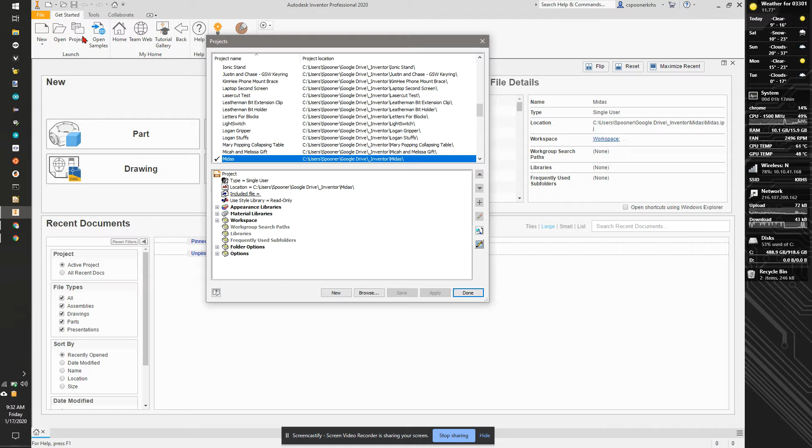I'm going to start a new project called Midterm Prep, and start off with the simplest, main part, the big block piece. On your midterm, you'll have drawings showing how big everything has to be, and it'll be your responsibility to dimension them properly. Here I'm just going to make up numbers since I'm doing a sample. So I'm going to start with this main block piece. It's going to be 4 inches by 4 inches by half an inch thick.

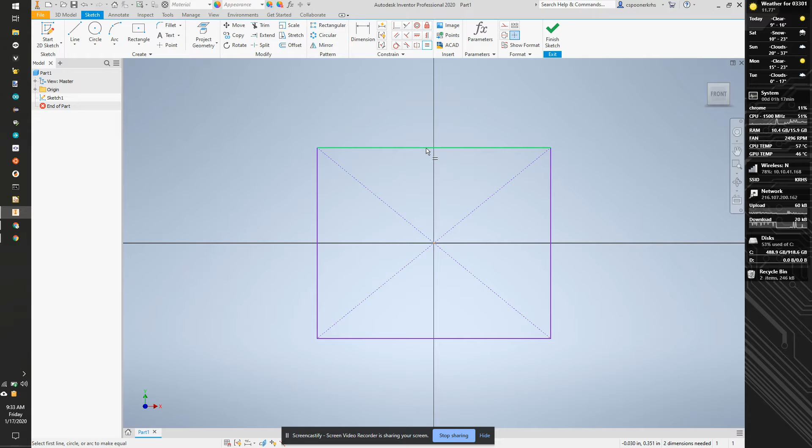I'm going to start with a center point rectangle so my origin is built around it. I'll equal both sides so it's square, dimension this to 4 inches, and extrude it half an inch.

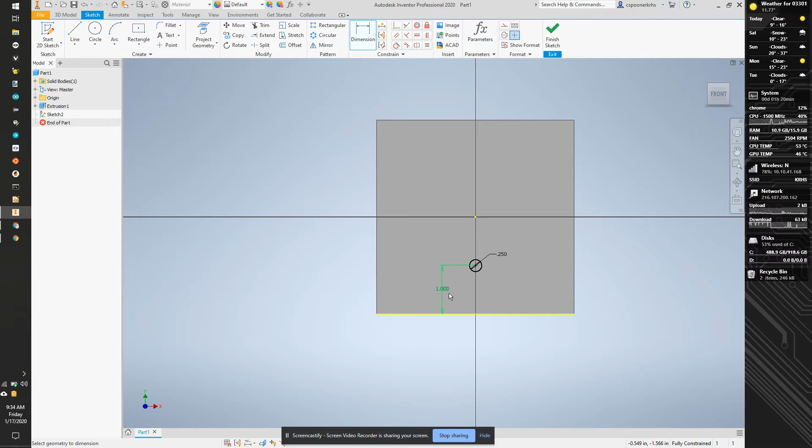I'm now going to make the hole for the pin using a simple circle drawn on this axis. I'll make it vertical to the origin, and dimension this circle to be 0.25, a 1/4 inch hole. I'll dimension it from the bottom to be 1 from the bottom. That looks better. I can extrude by hitting E, and cut this through.

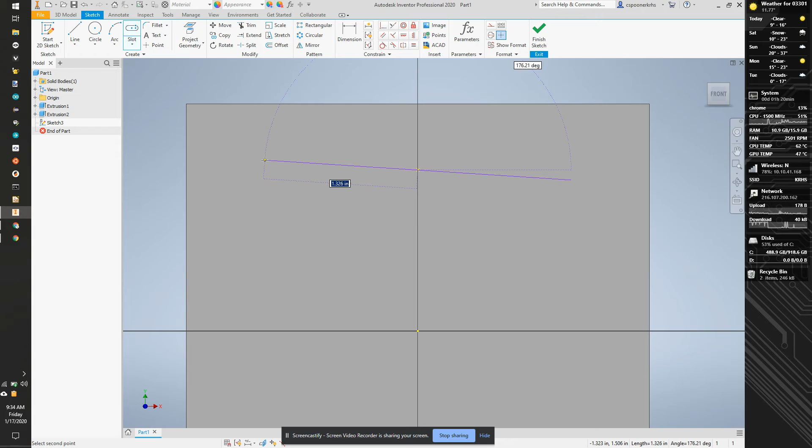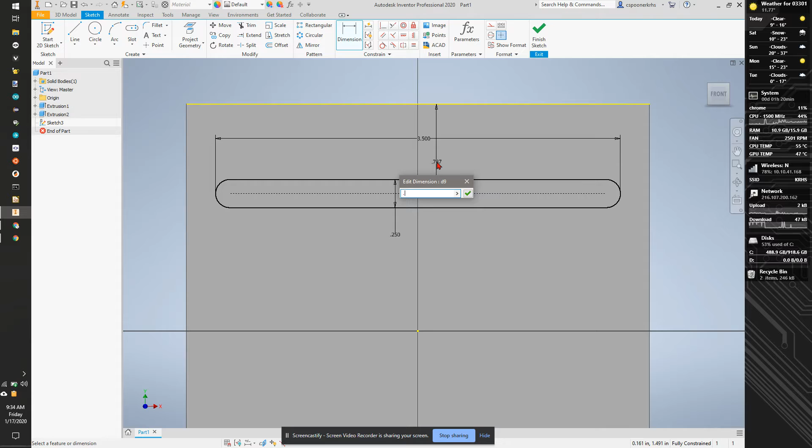I'm now going to build the slot, starting at the top. I'll use center point slot, make this 1/4 inch wide, and make sure the center of the slot is vertical to the origin. I'll set the overall length of this slot to be 3.5 inches, and set it so the center of the slot is 0.5 from the top. I'll shoot this all the way through.

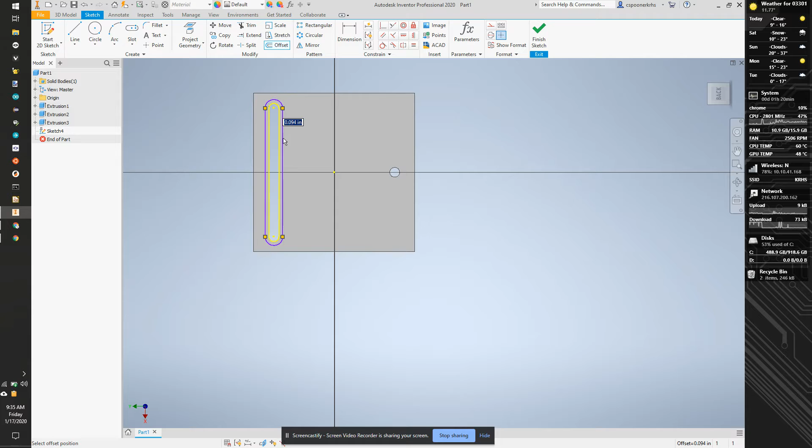I'm now going to go to the bottom and start a sketch, projecting the geometry of the slot. I'll use offset to make a second slot that's bigger by 1/8 of an inch, and extrude this 1/4 of an inch inwards, so I'm going to cut 0.25. I'll be paying attention to this as I do it, because this is literally what we're going to do for the test. It's going to be very similar to this.

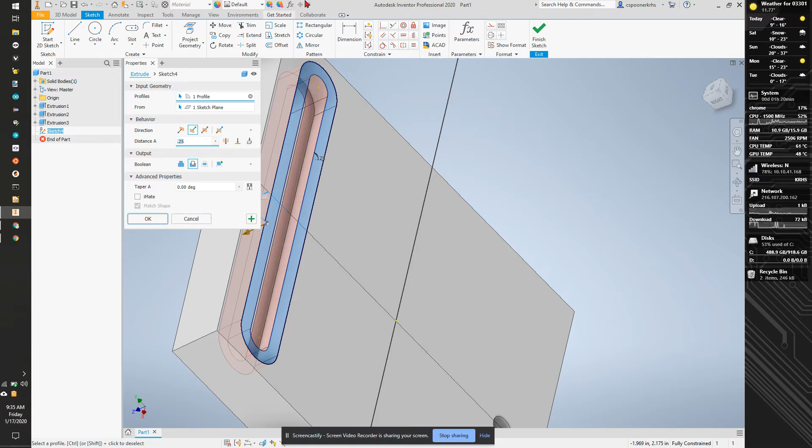So I now have my block piece, done. I could add some fillets, and if I dimensioned fillets I'd show them, but I'm not going to bother with that. I'm going to save this as base.

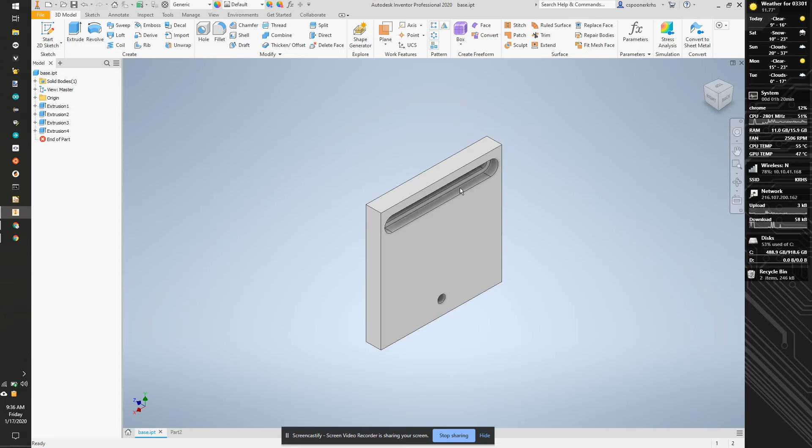The next piece I'm going to make is the stopper piece in the middle. My stopper piece is going to be 0.5 inches on the bottom, and a 1/4 inch tall.

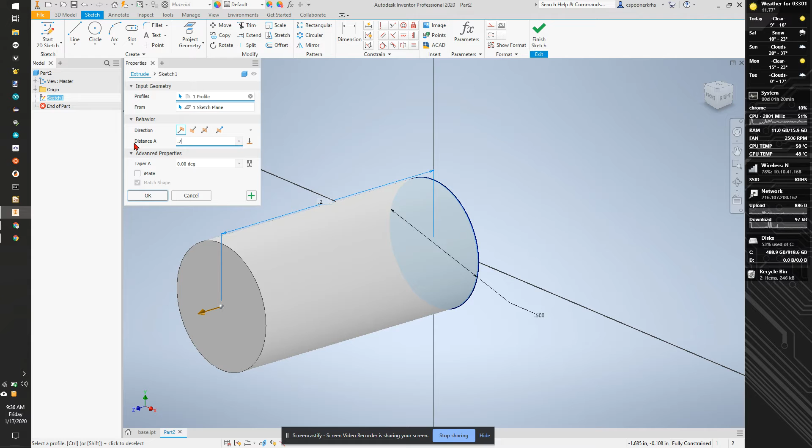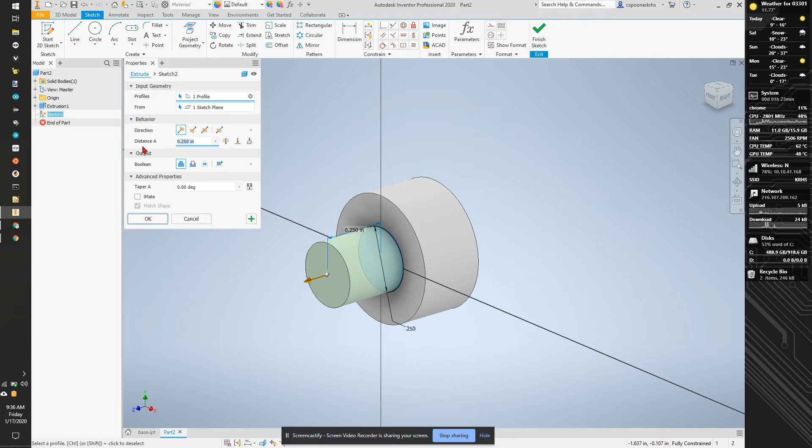I'm going to extrude a new circle, a 1/4 inch circle. This is going to be the part that goes into the slot to hold it in place, and it's going to be 1/4 inch tall, so it can sit out and get grabbed by the lever arm piece. I'm also going to change its color to gold. Save.

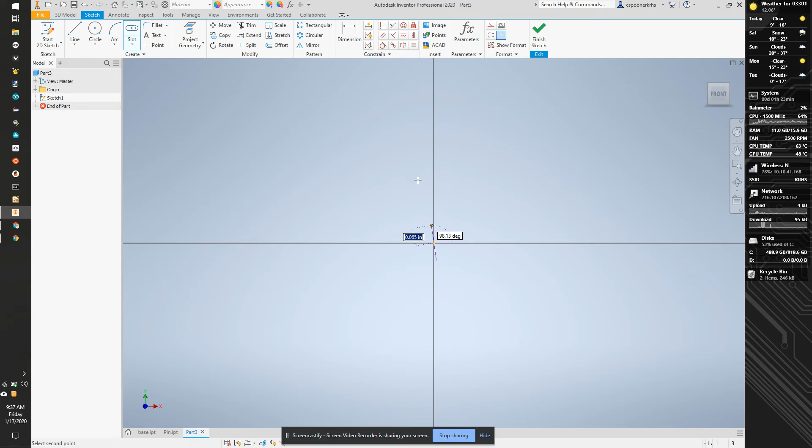Now I'm going to make the arm piece. I'll start a sketch using end point slot, or center point slot. I'm going to make this thing a 1/2 inch across.

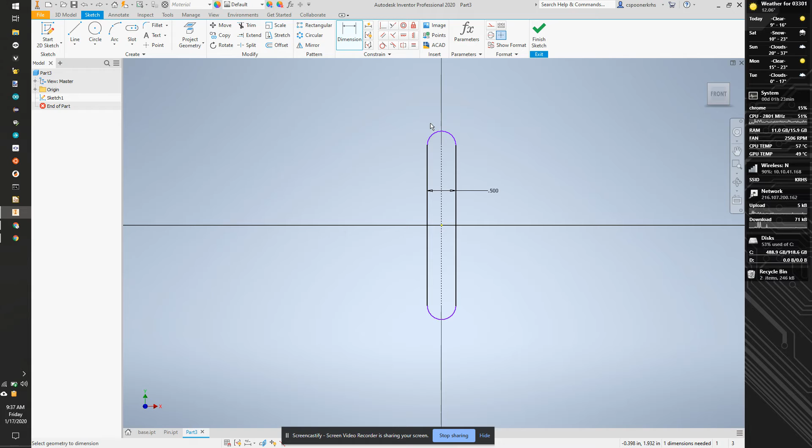I'm going to make this thing also 4 inches long. I want to go from very tippy top to very tippy bottom and get it to be 4. When I do the bottom, I want to look for the other round symbol, and make it 4 inches long. I'm going to extrude it 1/4 inch.

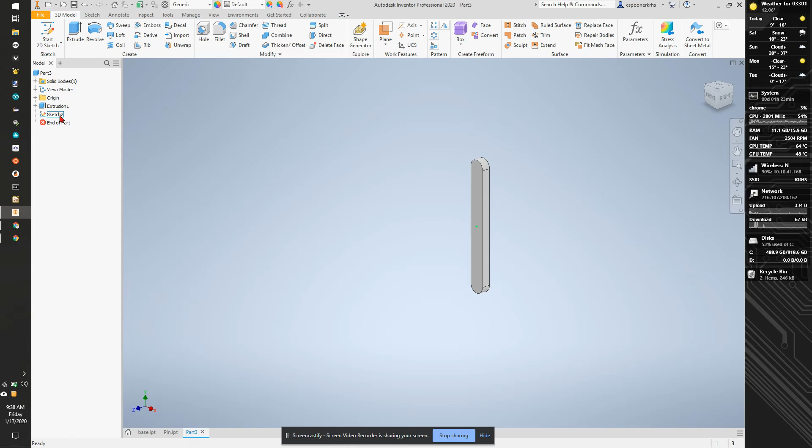I'm now going to add the pinhole in the bottom. I'll start a sketch and project geometry so I can see all the shapes here. I'm going to put a 1/4 inch pin here, and it's going to be 1/4 inch long. That's going to be the pin that inserts into the base.

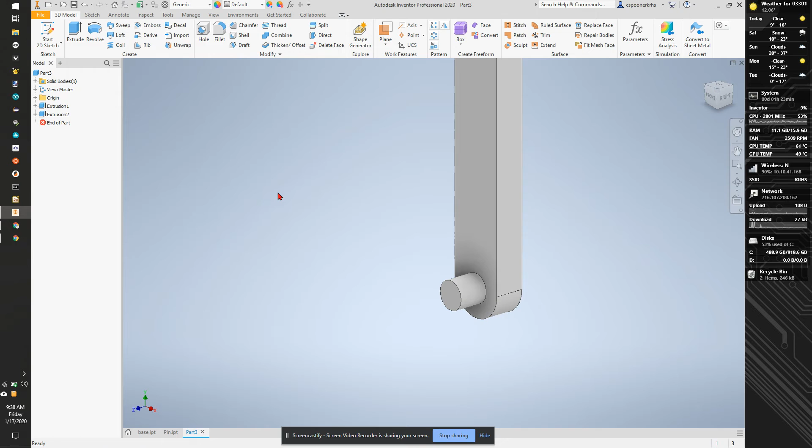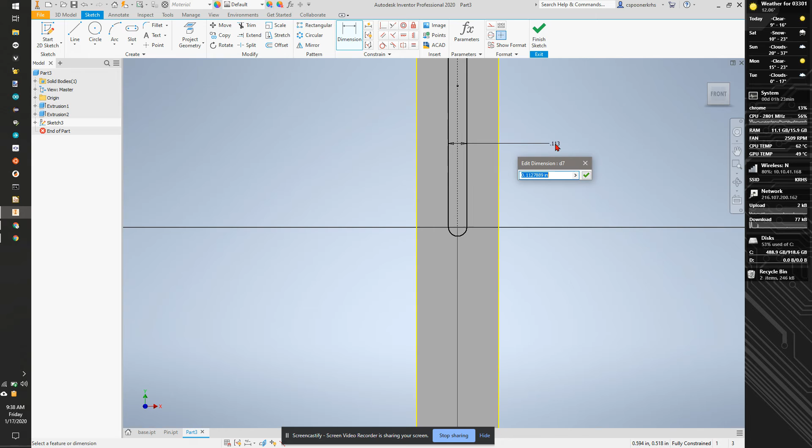Now I'm going to make the slot that drives the rest of this. I'll project geometry, and switch my slot type to center to center. I'll dimension this whole slot to be 1/4 inch wide. So now I have my arm, my base, and my peg. I'm going to change this piece to be a different color.

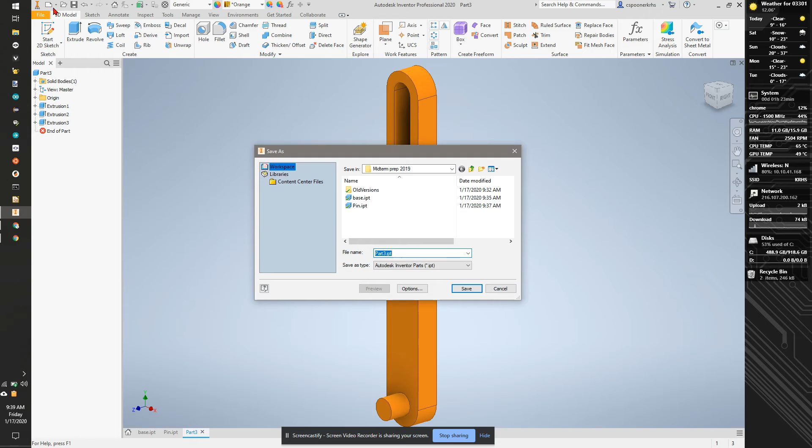Orange works. So I'm now going to start an assembly. My assembly is going to have one of each of these 3 pieces, and I'm going to ground the base by right clicking.

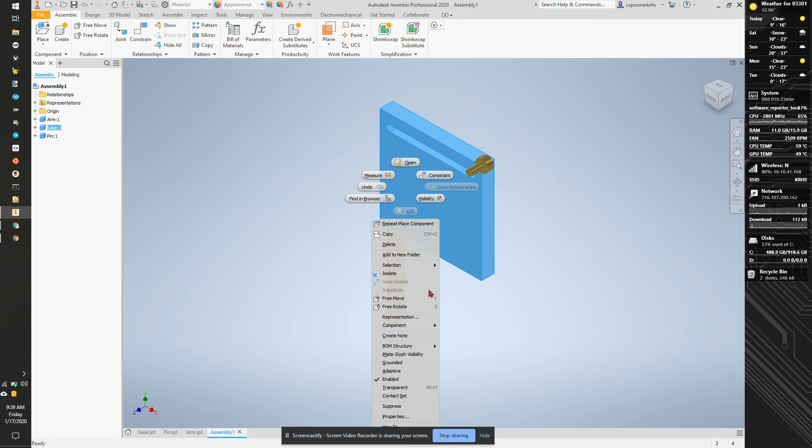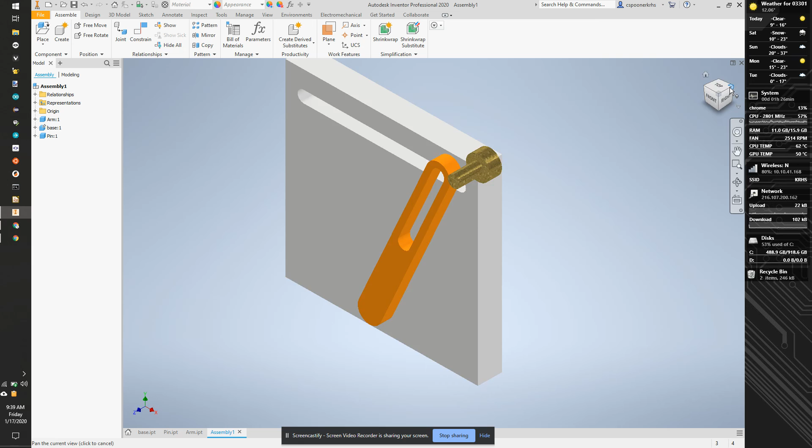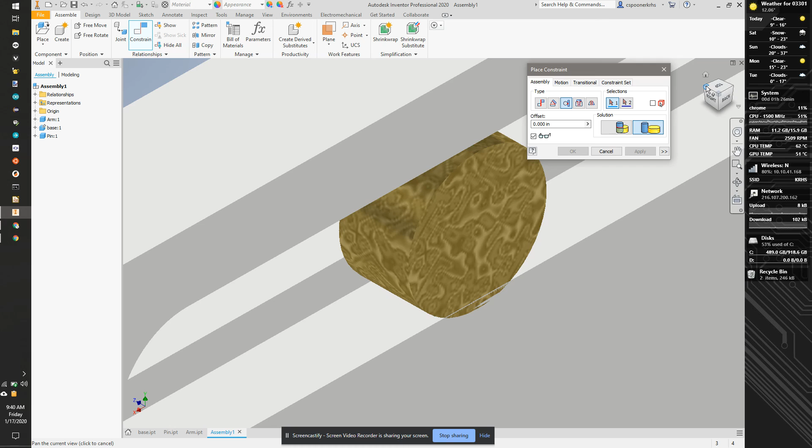The first thing I know is that this pin here can get inserted into this hole. That makes it so the arm can now move around. Now this guy here, I know that the top surface of this thing gets mated to the top of this surface. And the edge of this, I can make tangent, which is like the round edge, round side, to this surface here.

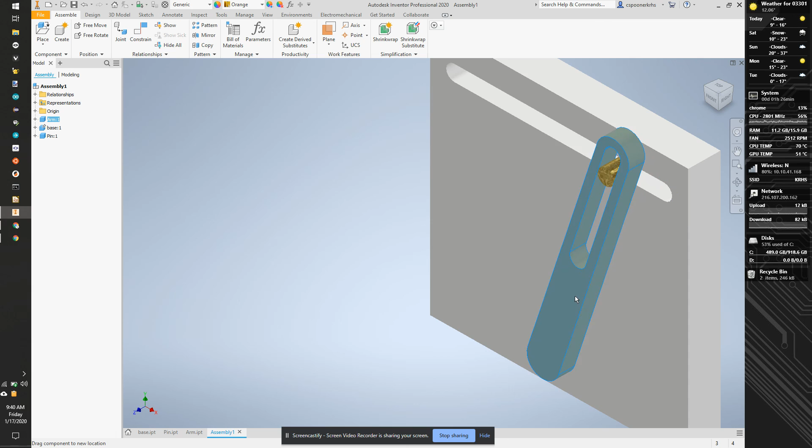Now I'm going to move this arm in here. This guy can move back and forth. I'm also going to constrain tangent between this peg and this arm. Now when I move this arm back and forth, it goes inside here. I can shoot it past the end, but now I have a linear motion from a rotary motion.

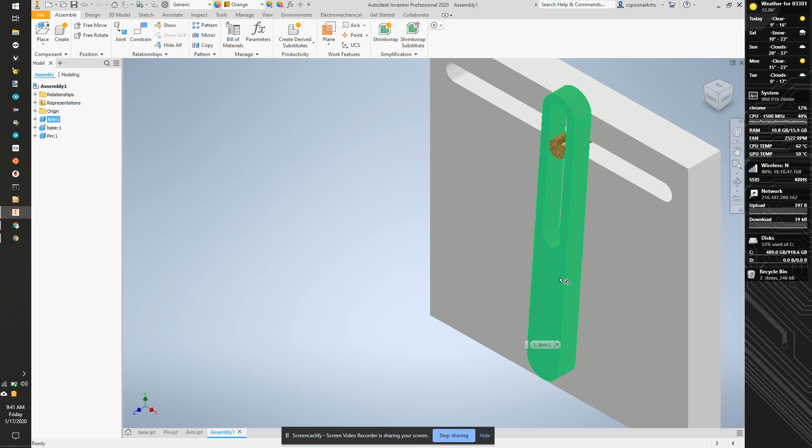Now it can shoot through the end because I don't have interferences turned on, but the basic shape here does it, and we could do more complicated shapes. You could have had an arc this way. This is just a standard pin and guide. The real trick here is not over-constraining things. If I over-constrained it and locked things to axes, I wouldn't be able to move this. But now I have a simple back and forth, left-right motion across here.